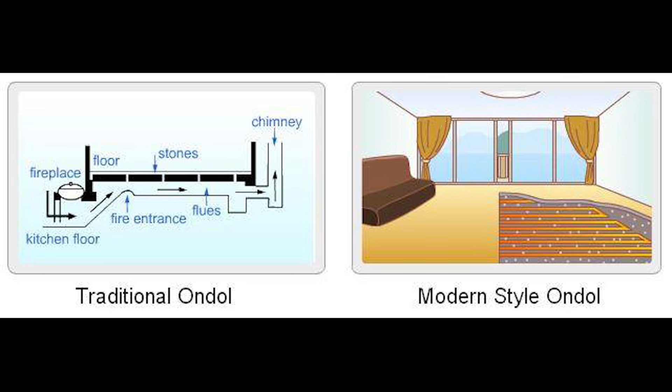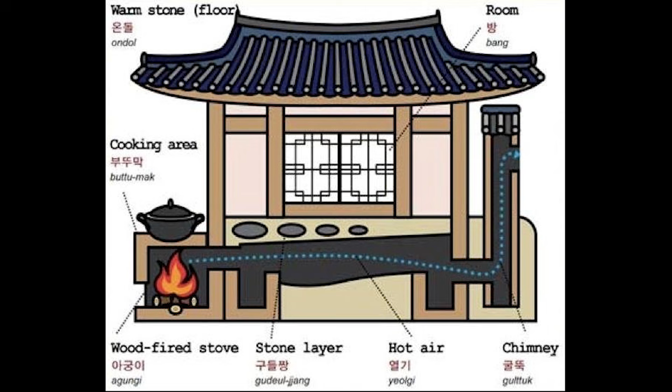The wind cut different in the Montana Territory highlands. Samuel Reed learned that his first winter of 1878, when his cast iron stove died at midnight, and by morning his cabin had dropped to near freezing, despite burning half a cord of wood. He had heated exactly the way every homesteader was told to heat: small iron stove inside, periodic firing, standard and proven. By spring, he had burned more fuel than two families should need.

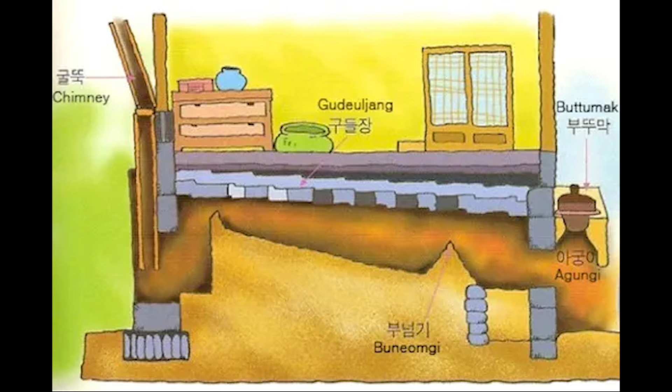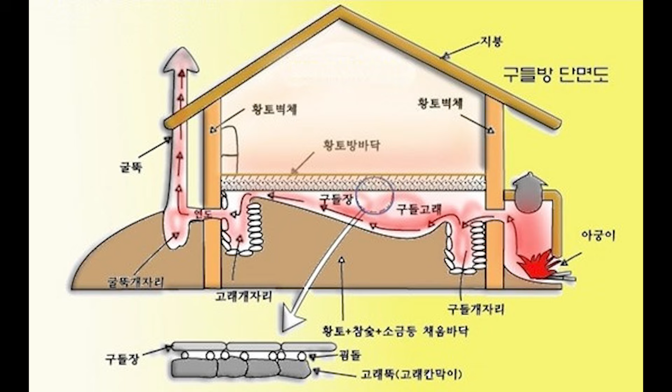Across the territory, settlers were fighting the same losing battle with stoves built by the book and failing by the season. Reed quietly borrowed techniques from older traditions to create a heating system that neighbors mocked as burying good money in the dirt. When the next brutal winter arrived, their cabins went cold by dawn while his stayed hot for 20 hours without refueling. What did he understand about heat and earth that every serious homesteader today ought to know?

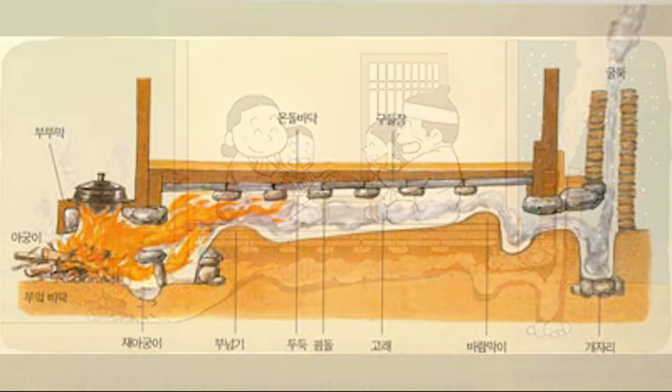Reed had spent 12 years trapping in the Wind River Range before settling in the Montana Territory highlands. Those winters taught him that survival meant reading what the land offered, not fighting it. He had watched Shoshone hunters hollow out snow caves that stayed warm all night from body heat alone, and he had seen old mountain men build lean-tos against south-facing rock faces that captured and held the day's warmth well into the dark hours. The earth, he learned, was not something to build above, but something to partner with.

When Reed filed his homestead claim in the spring of 1877, he built his cabin the way the Territorial Land Office manual instructed: raised on log sills, tight chinked walls, small cast iron stove positioned near the center. The Sears catalog promised that a Model 12 heating stove could warm 600 square feet with 2 armloads of split wood per day. The manual assured him that elevation above ground prevented moisture rot and that frequent firing kept interiors comfortable through the coldest months.

The first serious cold snap that November proved every word wrong. Outside temperatures dropped to 8 degrees below zero for 5 straight nights. Reed fed his stove every 3 hours, burning through seasoned pine and oak at a rate that would exhaust his winter supply before January. Yet by dawn, frost formed on the inside of his windows. Water left in a tin cup near the stove developed a skin of ice. His boots, placed 2 feet from the firebox, were stiff with cold each morning.

The elder described winter lodges built half underground, their floors warmed by buried coals that burned low and steady until dawn. These memories converged into a simple question: If earth and stone held heat better than air and wood, why did frontier wisdom insist on heating air and wood?

Reed began his experiment the following spring. Instead of positioning his stove inside the cabin, he dug a circular pit 3 feet across and 2 feet deep just outside his south wall. He lined the bottom and sides with flat sandstone gathered from a nearby creek bed, fitting the stones tightly and sealing gaps with clay mud.

The pit resembled the ancient fire rings Running Wolf had described, but Reed adapted it for his cast iron stove. He purchased a length of stove pipe and constructed a short tunnel connecting the stone-lined pit to his cabin interior. The tunnel, also lined with stones and sealed with clay, allowed heated air to flow indoors while keeping the firebox itself buried in earth. A separate chimney, built from stacked stones and extending above ground level, carried smoke safely away from both pit and cabin.

The innovation drew immediate skepticism. Brennan visited during construction and declared the project a foolish waste of good digging time. He argued that burying a perfectly good stove invited rust, moisture damage, and poor combustion. "Stoves belong indoors where you can tend them proper," he insisted. "That pit will flood with the first hard rain and ruin everything you put in it."

Other neighbors shared Brennan's doubts. Sarah McNeil, who ran the small trading post 12 miles down valley, predicted that Reed's underground fire would create dangerous gas buildup. "You'll poison yourself with smoke backing up through that tunnel," she warned. Jan Kowalski examined the stonework and shook his head. "In Poland, we build stoves high, not low," he said. "Fire rises, heat rises. You fight nature with this digging."

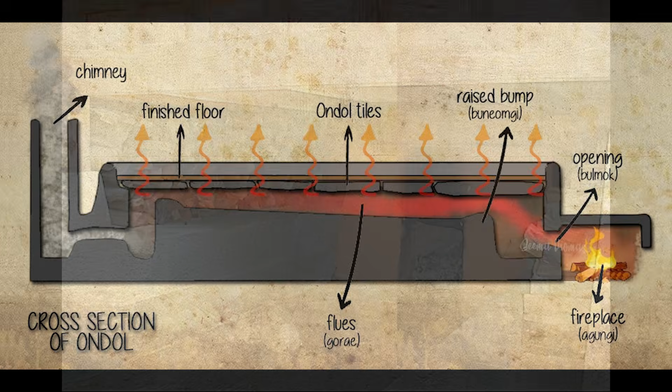During his trapping years, Reed had sheltered in earth-banked structures built by French voyageurs along the Missouri River. These traders constructed winter quarters by excavating shallow depressions, laying log foundations directly in the earth, then packing clay and soil around the base logs until ground level reached the cabin floor. The technique eliminated underfloor air circulation entirely while using earth contact for thermal stability.

Reed also recalled detailed conversations with Klaus Weber about European pithouse construction. Weber described Polish and German villages where families spent winters in dwellings built partially underground. "We dig down 1 meter, build walls up 1 meter," Weber had explained. "Earth keeps cold out, keeps heat in, no wind under floor because no space under floor."

Weber claimed these semi-subterranean homes stayed comfortable through alpine winters using minimal fuel. The solution required extending his buried stove concept to the cabin foundation itself. Reed began excavating around his existing cabin, removing soil from beneath the raised floor structure. The work proved backbreaking in frozen ground, but by late January he had carved out enough space to lower his cabin floor to ground level.

He then implemented the earth banking technique learned from voyageur practices. Reed mixed clay soil with water to create thick, moldable mud, then packed this material tightly around the base logs where they met the earth. He built up the clay banking until it formed a seamless seal between foundation and ground level, eliminating every gap where cold air had previously infiltrated.

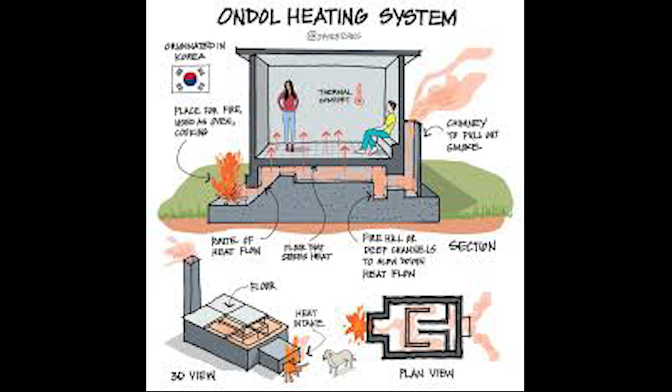Reed recalled seeing ancient fire rings where native hunters had heated large stones, then moved the hot stones into sleeping areas or cooking pits. The heated rocks provided steady warmth for entire nights without maintaining active fires. European settlers had simply scaled up the concept using masonry construction.

Weber offered to help Reed build thermal mass into his existing cabin. They began by constructing a heavy stone bench along the cabin's north wall, directly opposite the tunnel entrance where heated air flowed in from the buried stove. The bench measured 6 feet long, 2 feet wide, and 18 inches high, built from sandstone blocks mortared together with clay-based mortar. The construction required precise stonework to maximize thermal mass while maintaining structural integrity.

Weber showed Reed how to select stones of uniform density, avoiding pieces with cracks or soft spots that might fracture under thermal stress. They fitted each stone tightly against its neighbors, creating continuous thermal pathways that allowed heat to spread evenly through the entire mass.

The mortar recipe proved critical for thermal performance. Weber mixed local clay with sand and chopped grass in specific proportions, 4 parts clay-rich soil, 2 parts coarse sand, 1 part finely chopped prairie grass. This mixture hardened into joints that expanded and contracted with the stones during heating cycles, preventing cracks that would reduce thermal efficiency.

Reed and Weber completed the north wall bench in late summer, then added a second thermal mass along the east wall. This second bench incorporated an innovation Weber remembered from his apprentice days. They built hollow chambers within the stonework, connected by small passages that allowed heated air to circulate through the interior of the mass before exiting into the cabin.

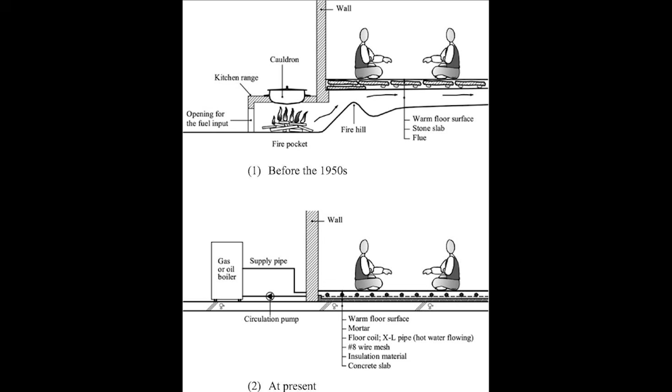By winter of 1879, Reed's integrated system combined 3 complementary principles: earth integration for foundation stability, underground combustion for efficient fuel use, and thermal mass for temperature regulation. The combination created heating performance that surpassed anything conventional frontier methods could achieve.

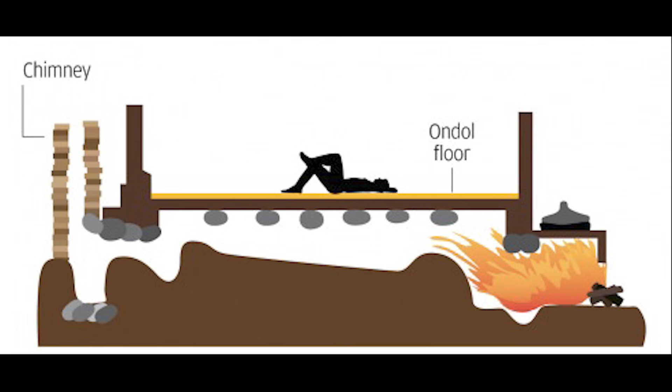Reed discovered a dangerous flaw in his system during the first week of December 1879. The thermal mass benches worked perfectly for temperature control, but the combination of his buried stove tunnel and sealed foundation created a deadly problem with indoor air quality. Smoke and combustion gases began seeping into the cabin through the connecting tunnel, especially when outside winds created pressure changes that reversed the normal airflow.

The first incident occurred during a windstorm that lasted 3 days. Gusting winds created shifting air pressure around Reed's cabin, sometimes pushing air down through his stone chimney and forcing smoke backwards through the tunnel system. Reed woke one morning with burning eyes and a persistent cough, finding a thin haze of smoke throughout his interior, despite the fire having died hours earlier.

The problem worsened when Reed realized that his earth-sealed foundation, designed to prevent heat loss, also prevented fresh air circulation. The same clay banking that eliminated cold drafts now trapped stale air, moisture, and combustion byproducts inside the cabin. His single window provided insufficient ventilation exchange, especially during winter months when opening it meant losing precious heat.

Klaus Weber recognized the symptoms immediately when he visited Reed in late December. "This is old problem from my country," Weber explained, examining the smoky residue on Reed's stone benches. "When you make house too tight, bad air stays inside. In Germany, we learn to separate the smoke path from heat path, and we make small holes for fresh air that do not waste heat."

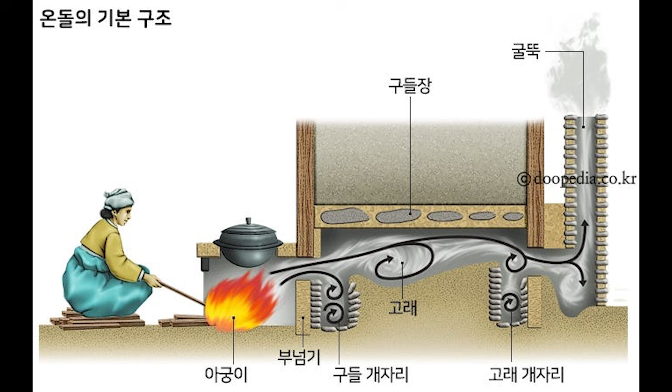Reed's innovations had evolved from desperate experimentation into proven technology that could be taught, replicated, and adapted to various frontier conditions. The integration of indigenous earth heating wisdom, European thermal mass traditions, and practical frontier materials had created heating solutions superior to conventional territorial methods while using resources more efficiently and sustainably.